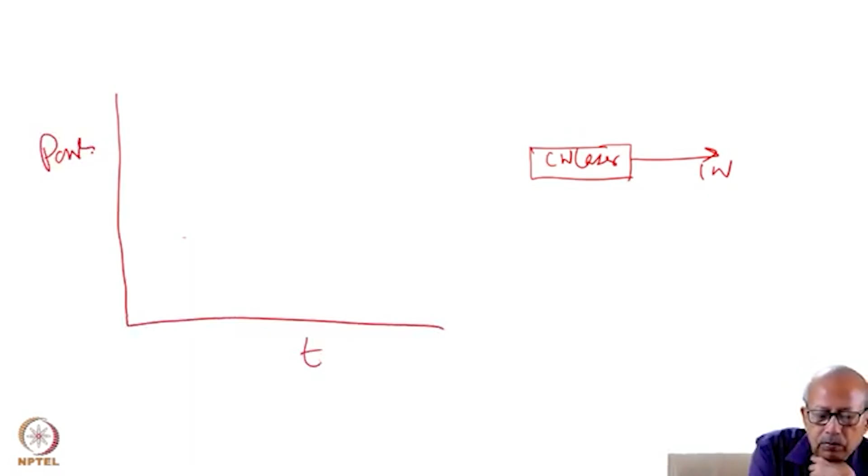It is giving out an output of power 1 watt continuously in time. So if we represent it pictorially, this is time, this is power, and this is 1 watt. So the laser is producing a continuous output of power 1 watt in time.

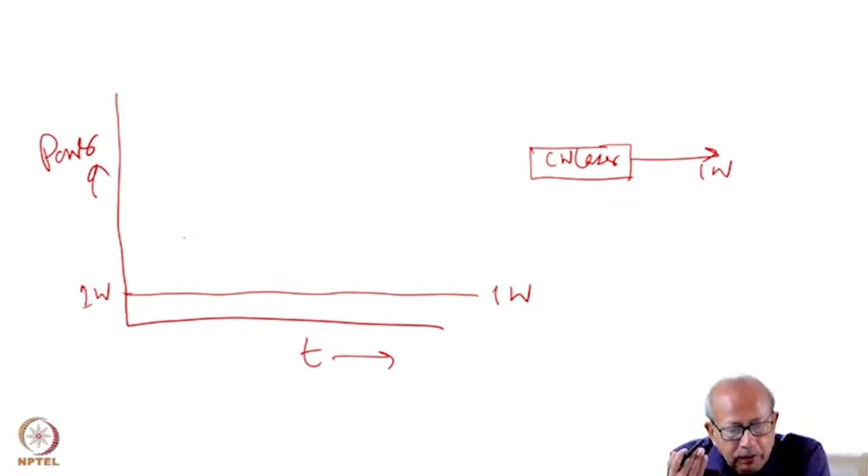Now, if you try to increase this power output by increasing the power of pumping, initially, as you increase the pumping power, you are dissipating more pump energy in time. So you will be creating more population inversion and in turn gain. Therefore, the laser would produce more output in the beginning. Suppose the laser, as a consequence of increased pumping, gives you a higher output.

But as you have increased the input energy to the lasing medium, more energy now would stay back into the system. And because of this energy, which is eventually dissipated, it will cause more heating of the lasing medium, and as a result, the population of the lower laser level will also increase because the temperature of the gas of the lasing medium will increase.

This thus in effect will reduce the population inversion. You have the upper laser level and lower laser level. If the population of the lower laser level is increasing because of increased temperature, that would reduce the population inversion and in turn the output power of the laser. So although initially the power may show a slight increase, eventually the power tends to reduce.

So 10 watt pump power means in 1 second, suppose this is my 1 second, at 10 watt power in 1 second, we are dissipating 10 joule energy. So that means this is 10 watt; we are dissipating 10 joule energy in 1 second. So in 1 second, the laser is also producing 1 joule as its optical output.

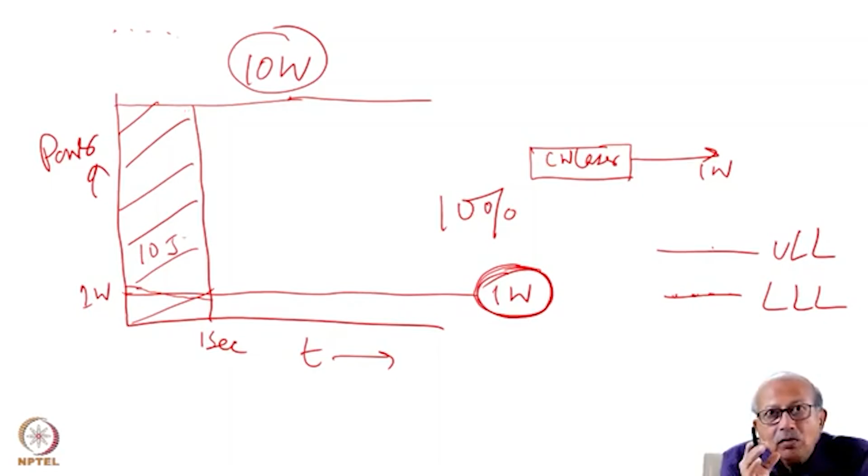Now we have said that if we try to increase this power, so from 10 joule, if we make it 15 joule, although there may be some initial increase in the output power, eventually power will reduce because as more energy is put into the system, the fraction of energy that stays back into the system also will increase. That will eventually increase the temperature of the medium, which would reflect in reduction of population inversion and in turn the output power of the laser. So how can you actually increase the power of the laser without making a provision for removal of the extra heat that is being generated?

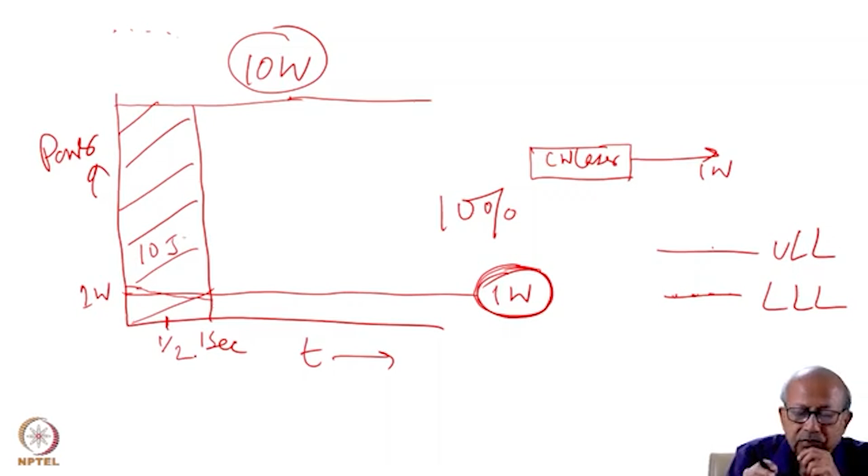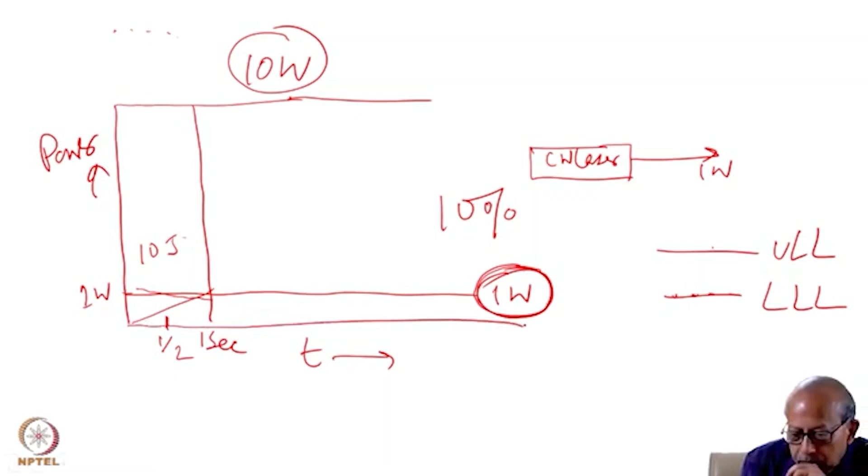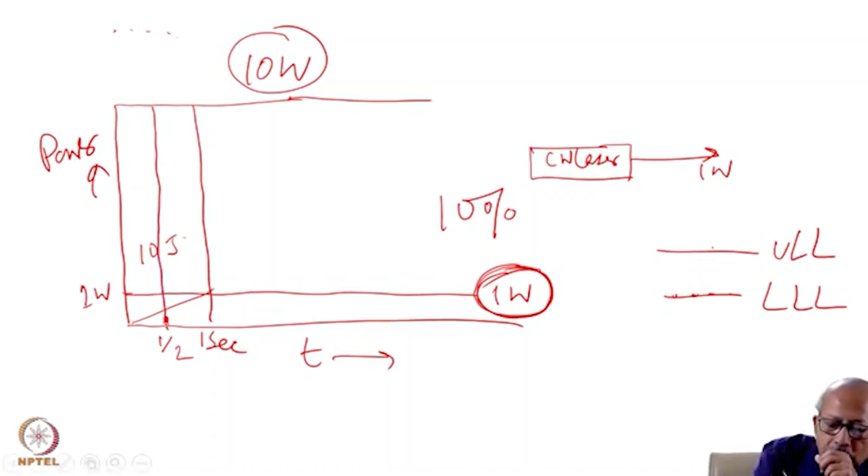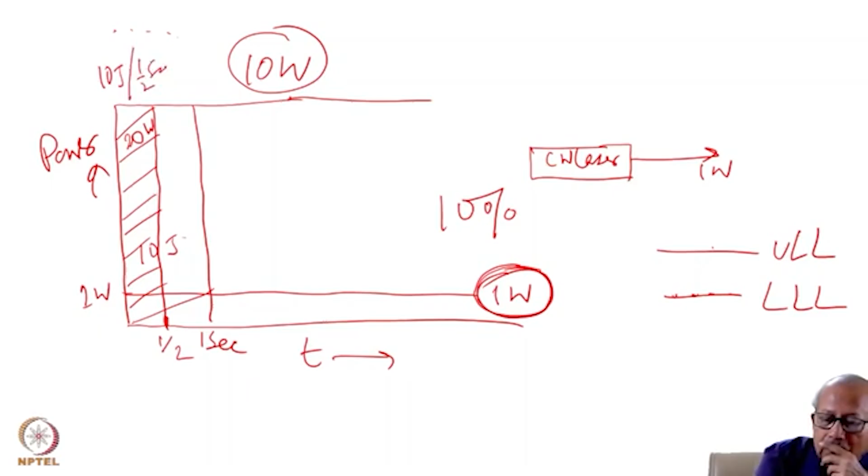You dump a certain number of joules of energy in a lesser time. For example, say we put this 10 joule of energy within a time which is half a second. So we are now putting this 10 joule of energy within half a second. Then the power that we have put in is now raised from 10 watt to 20 watt, because 10 joule of energy is now being put in half a second.

Now because you are putting in so much more energy in half a second, this will also create more population inversion and in turn the gain, and the laser will also tend to give more output. So the laser would produce more power.

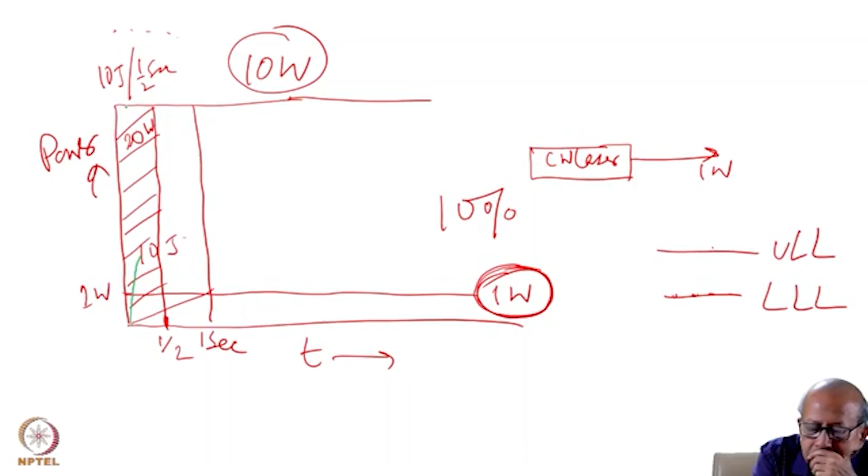Now because it is a pulse, it is being pulsed, so the energy will eventually go to zero, the energy that is being pumped in half second. The output power of the laser also would then become zero as the pumping stops after half second. Now at this point, the temperature of the medium has risen much more than what was happening in the case of continuous operation, where the pumping power was 10 watt.

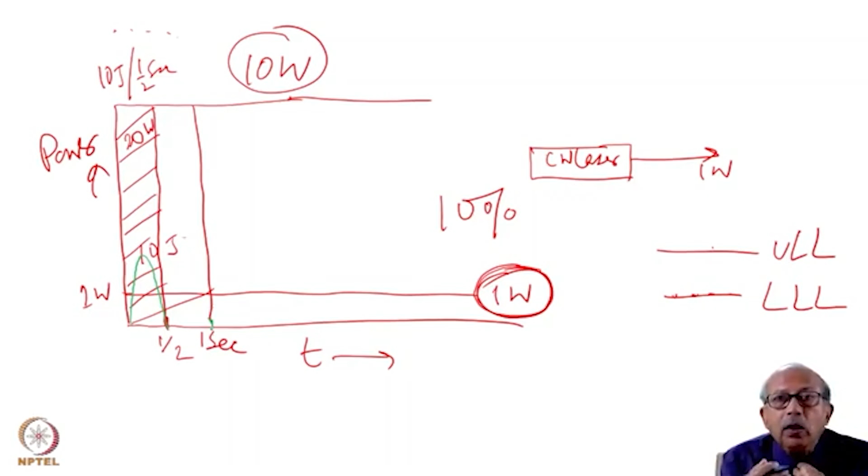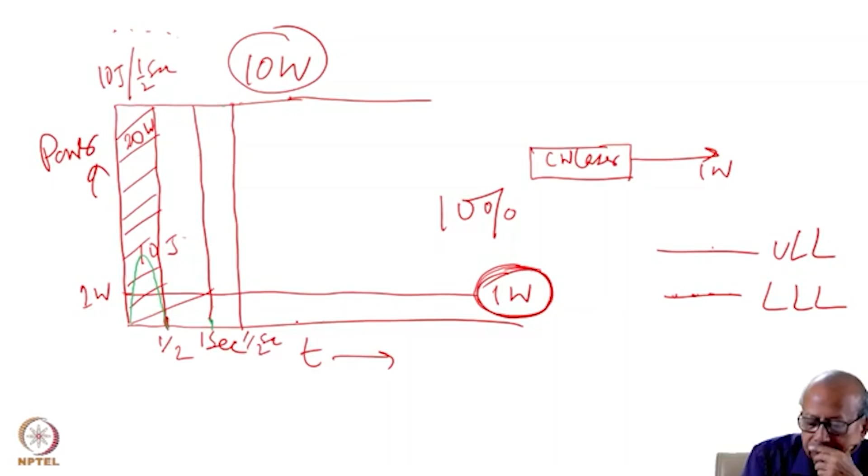Now at this point, we wait for next half second, and the medium will then return to the ambient condition. And at this point, we put again 10 joule energy for half second. So we will have now the next pulse.

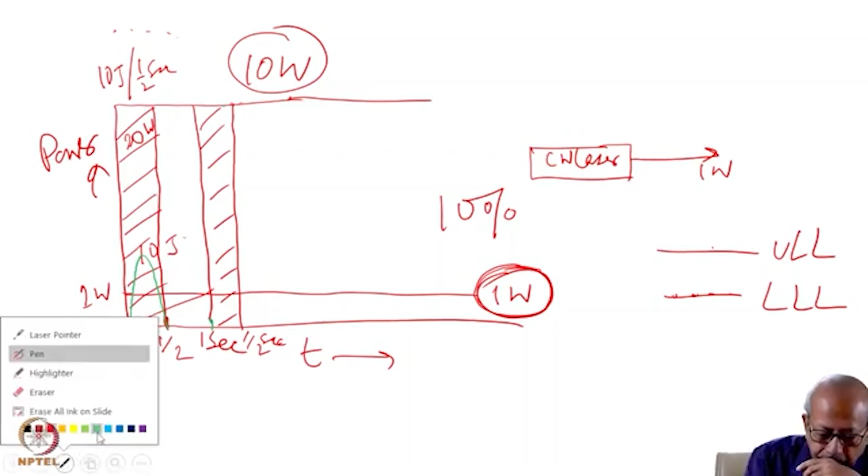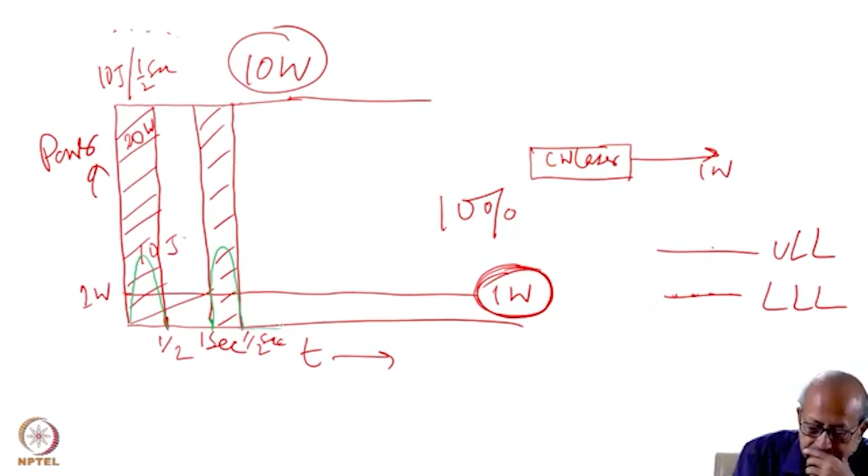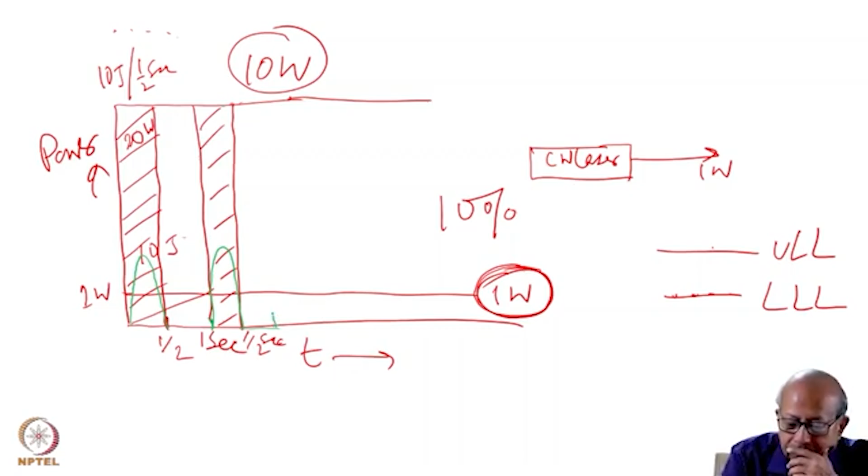So wait again half second before the temperature comes back to the ambient condition. So you put again the next pulse, and so on. By pulsing, you produce a train of pulses, and the peak power of the pulse will be more than the continuous power that was otherwise possible for the laser to emit.

Although the peak power has increased, you can clearly see the average power of the laser may still remain the same as 1 watt. So you may be wondering, why then go for all these things, because the average power may still remain the same as 1 watt? The reason is you may be looking for some application where 1 watt power will not suffice. You need more power, but you don't need that power continuously. You may need that increased power only for a brief period.

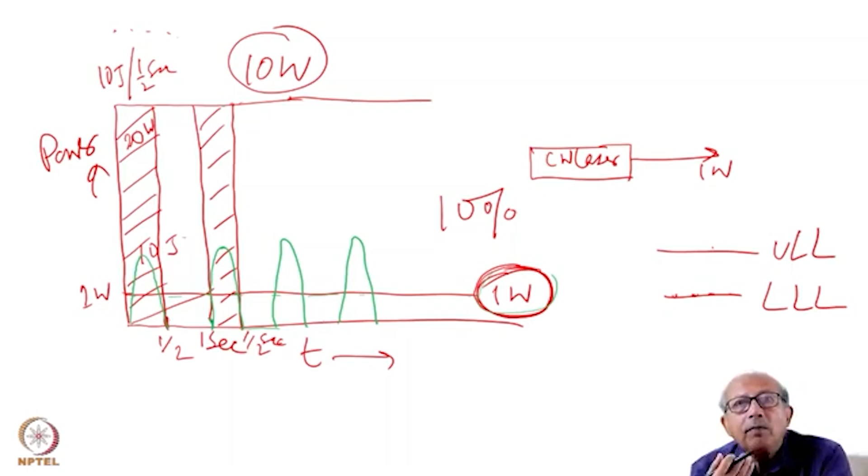That is where this comes handy. So you increase the output power, but over a brief period of time, by not making any provision to remove the extra heat that is being generated. You simply pulse, concentrate the energy within time, and you increase the power that is produced. So I think you have now understood the concept of pulsing, and how by pulsing a laser you produce more power, which otherwise would not have been possible by operating the laser in continuous mode.

Now, the next question we ask is, what is the maximum achievable power from a pulse laser? Can you indefinitely increase the peak power of a pulse laser? Well, to understand this, let us consider two situations where the energy is being pumped slowly and rapidly.

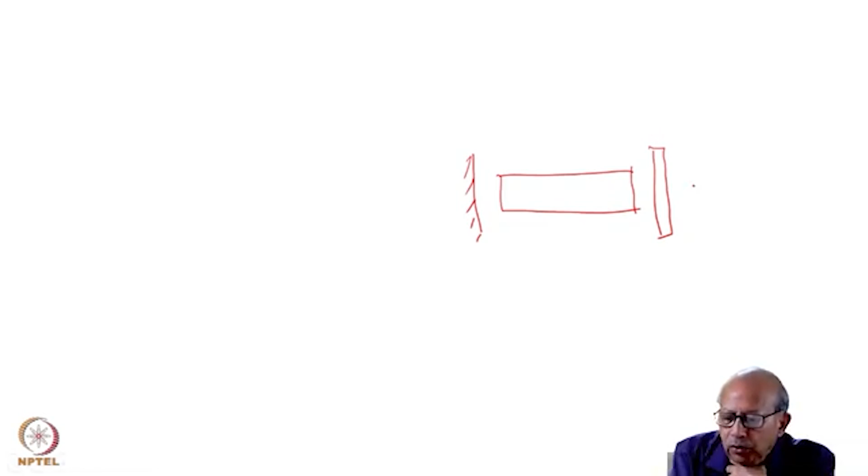Now, where does the loss actually take place in the cavity? It essentially takes place through the partially transmitting mirror. You have your gain medium placed in a cavity. One mirror is 100% reflective, the other is partially transmissive, through which you couple out a part of the light that builds up inside the cavity, which is the useful loss forming the laser beam.

Now this transmission loss of the partially transmitting mirror is independent of time. It doesn't depend on time. And therefore, the loss can be represented as a straight line parallel to the time axis in this gain curve. This is the gain.

So loss doesn't depend on time, and hence it can be represented as a straight line parallel to the time axis. This is the loss, represented as a straight line parallel to the time axis in this gain curve.

Now commencement, when will lasing begin? Lasing will begin at the instant gain crosses the loss line. When pumped slowly, this occurs at a later time, and when pumped rapidly, the gain builds up faster and crosses the loss line earlier. At this point, oscillation and stimulated emission set in, amplification of light begins, and the laser pulse starts building up. So commencement of lasing begins at the instant gain crosses the loss line.

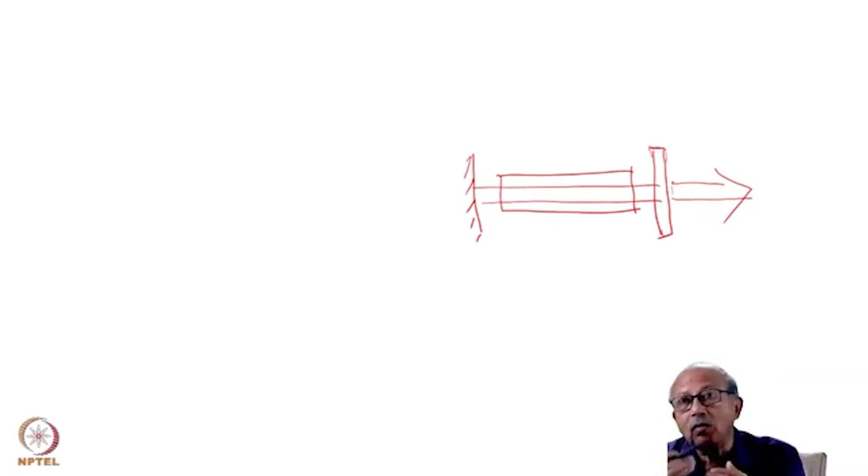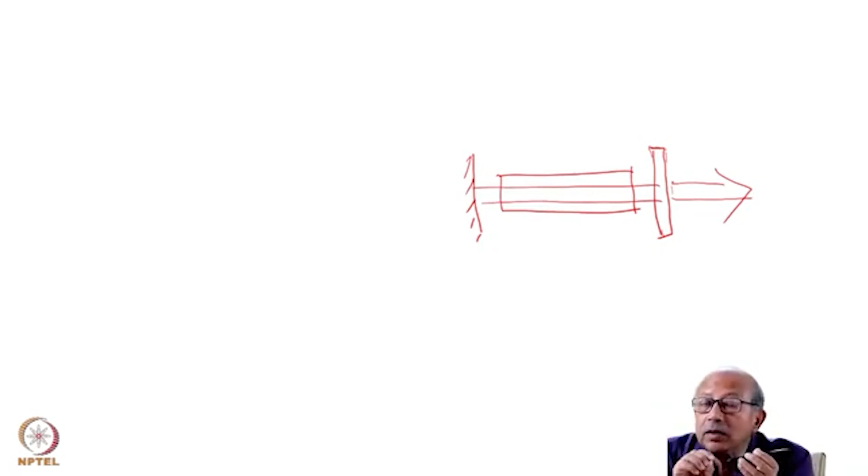Now, stimulated emission adds a photon to the system, but reduces the population inversion at the same time by 2. Let us appreciate this point. Say this is your cavity. You have the active medium because you have pumped it, so the gain has risen, and once it has crossed the loss line, oscillation has begun, and light is actually growing inside the cavity as a result of to-and-fro oscillation of photons, initially seeded by spontaneous emission. You know all these things quite well.

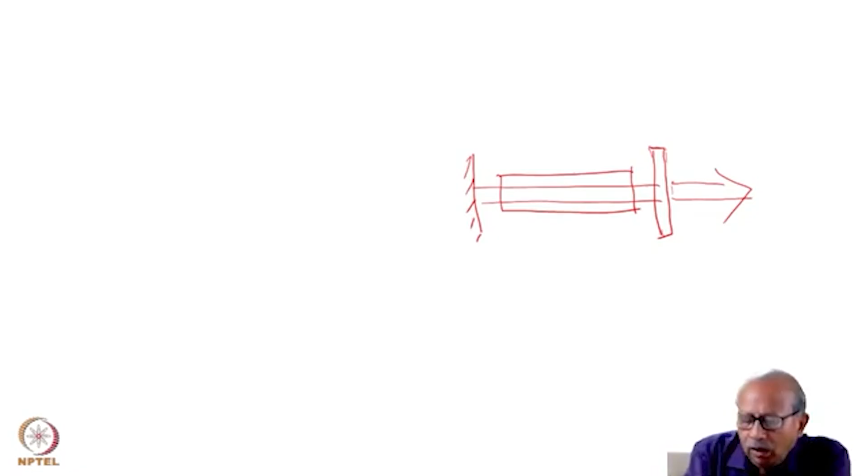Suppose we consider the two energy levels between which population has been inverted. This is the lower laser level, this is the upper laser level. Let us consider a situation where the lower laser level has 4 atoms, and the upper laser level has 10 atoms.

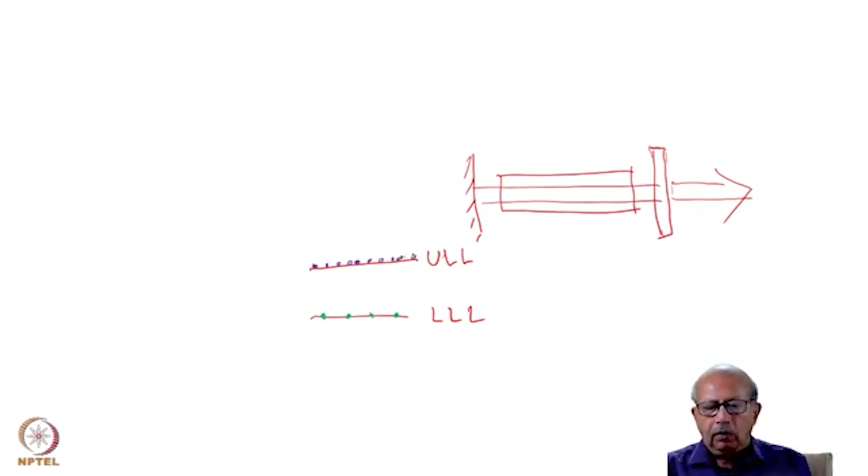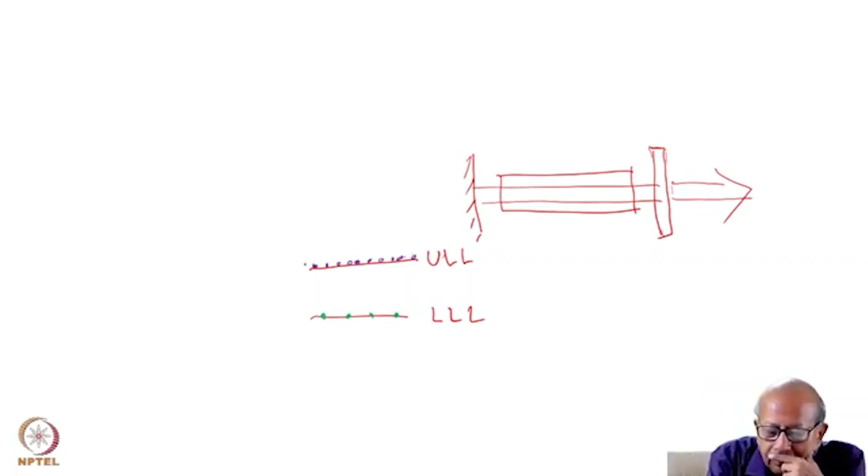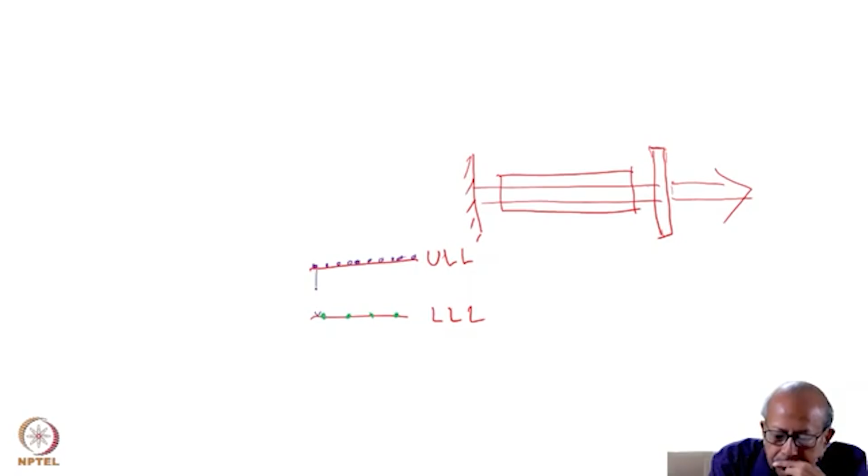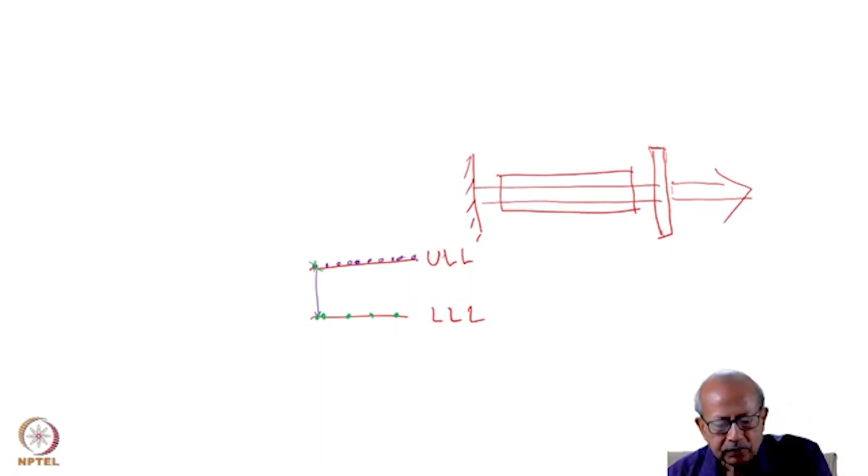Now let us consider one stimulated emission. There will be many stimulated emissions happening, but let us just consider what happens with a single one. This atom is stimulated by the oscillating photons, and as a result, it comes down to the lower laser level. So it now becomes this, and this atom has vanished, instead coming down to the lower laser level.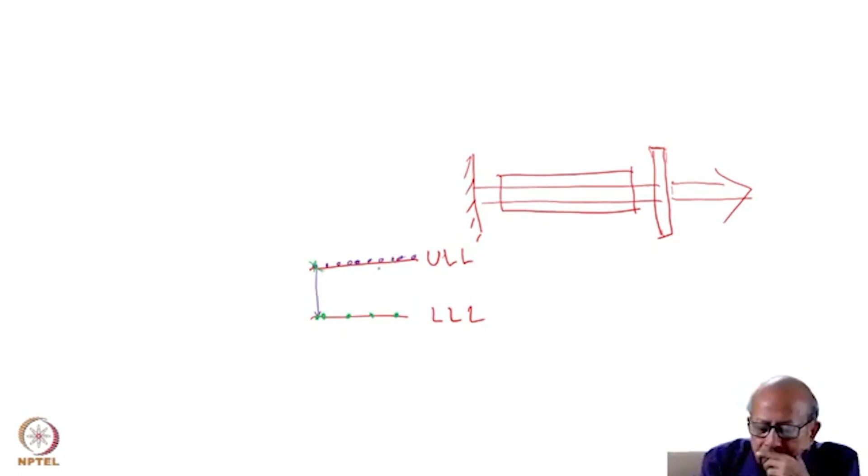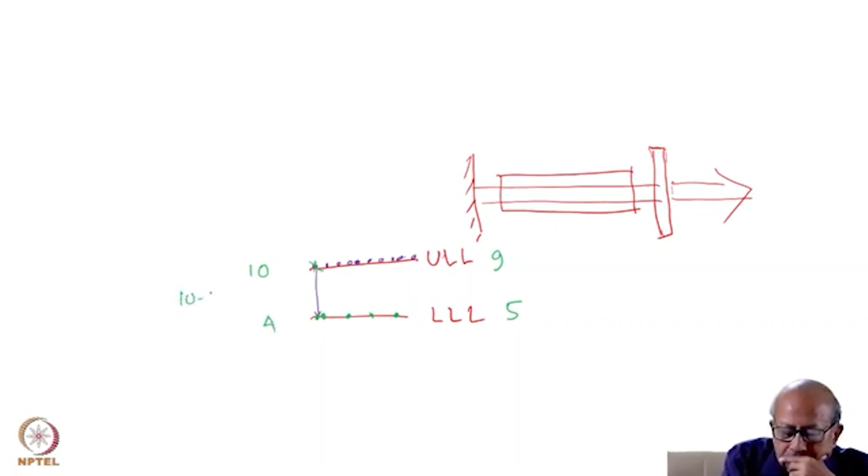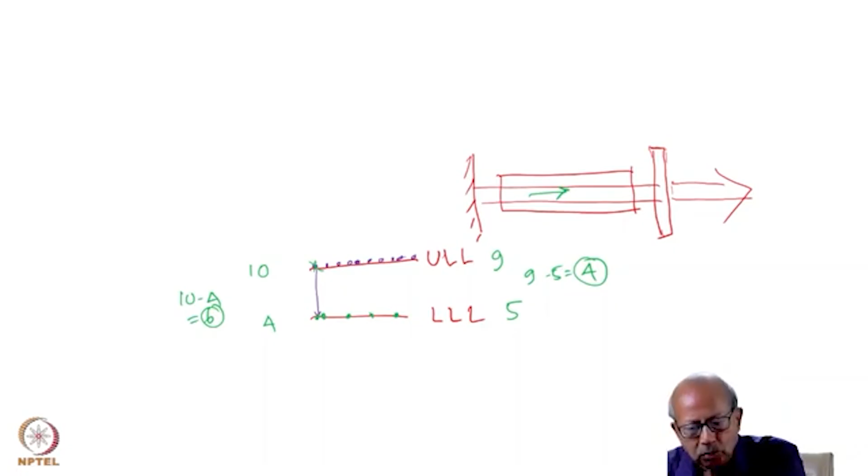After this happens, the population at the upper laser level is now 9, and the lower laser level is 5. Before this happened, the population in the upper level was 10 and the lower level 4, so the population inversion was 10 minus 4 equal to 6. Now it is 10 minus 5 equal to 5, wait, 9 minus 5 equal to 4. So the stimulated emission has added one more photon to the system, but at the same time reduced the population inversion from 6 to 4. That means population inversion has been reduced by 2, while stimulated emission has added one more photon to this system of photons oscillating inside the cavity.

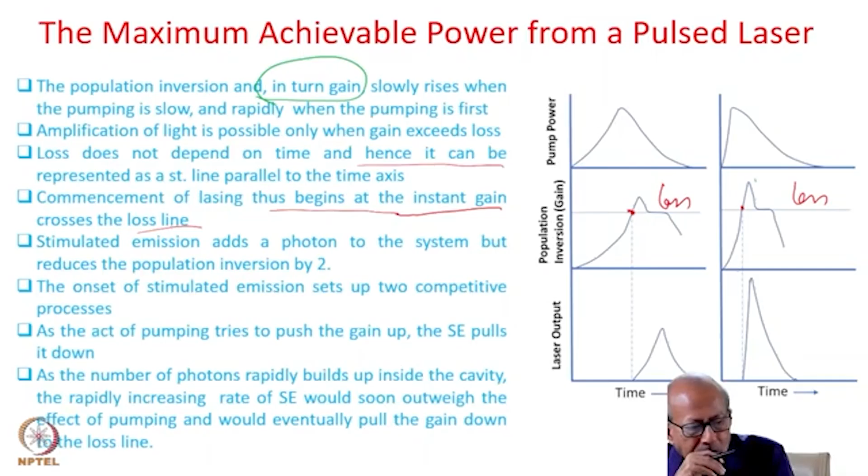Thus we can say the onset of stimulated emission sets up two competitive processes. Why? Because the act of pumping is trying to push the gain up, as we are putting more energy into the system, this tends to increase the gain, while stimulated emission pulls the gain down. So the act of pumping tries to push the gain up, and stimulated emission tries to bring the gain down. True, stimulated emission also adds photons to the system, but at the same time reduces the gain.

Now, as the number of photons rapidly builds up inside the cavity as a result of stimulated emission, the photon number increases. And if the photon number increases, it also increases the rate of stimulated emission, because stimulated emission is proportional to the number of photons present. More photons means more stimulated emission, and more stimulated emission means you are pulling down the gain at an increased rate, because each stimulated emission brings down the gain by 2.

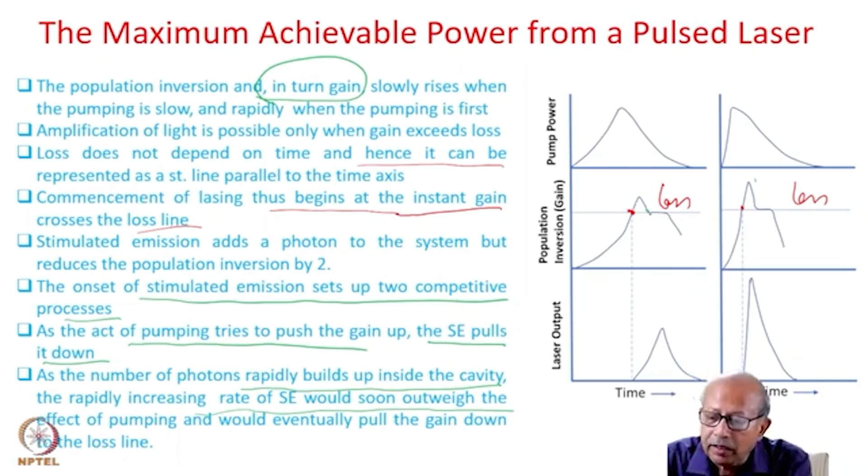Thus we can say that the rapidly increasing rate of stimulated emission would soon outweigh the effect of pumping and would eventually pull the gain down to the loss line. Because you are trying to increase the gain, but the stimulated emission rate, continuously increasing more and more rapidly, would eventually succeed in pulling down the gain to the loss line. And once this happens, thereafter the gain remains clamped to the loss line.

Imagine the situation where you have slightly increased the gain to some extent. Once this situation has been attained, you try to increase the gain further. The moment you try, the stimulated emission rate also increases along with the gain, because more photons will be generated, and then immediately it tries to bring the gain down. So once the gain comes to the loss line, it stays clamped there. This is called gain clamping.

So it will continue until the waning of pump. You are actually pulsing it, putting the pump energy in the form of pulses. Eventually the pump energy will tend to reduce, which will put the gain below the loss line. It has to happen.

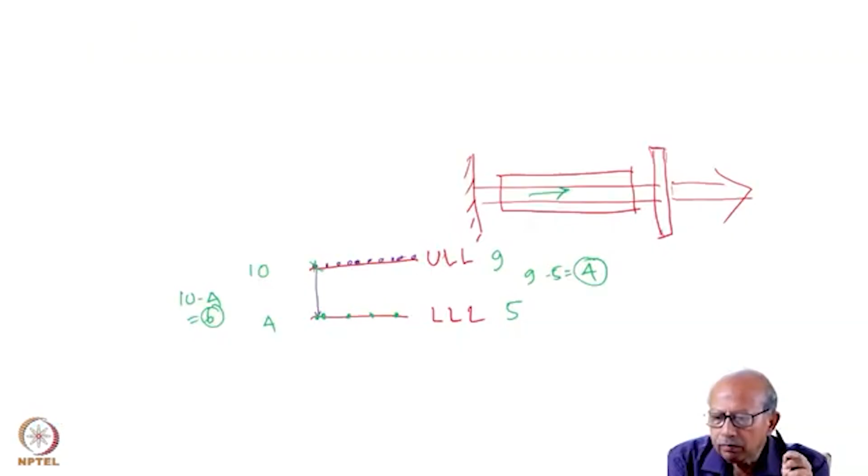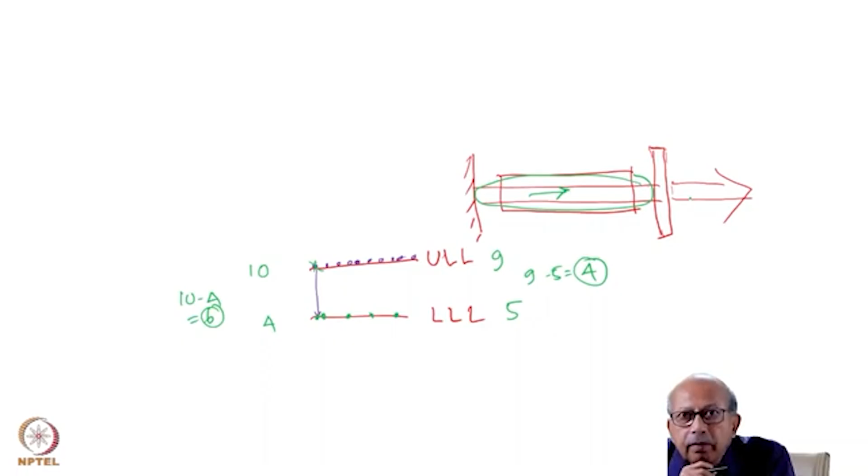However, the photons still present inside the cavity will continue to emerge through the partially transmitting mirror. Now, gain has fallen below the loss line, so there cannot be any more oscillation. But photons already present inside the cavity will continue to emerge through the partially transmitting mirror. The higher the transmission loss, the faster they will emerge, and vice versa.

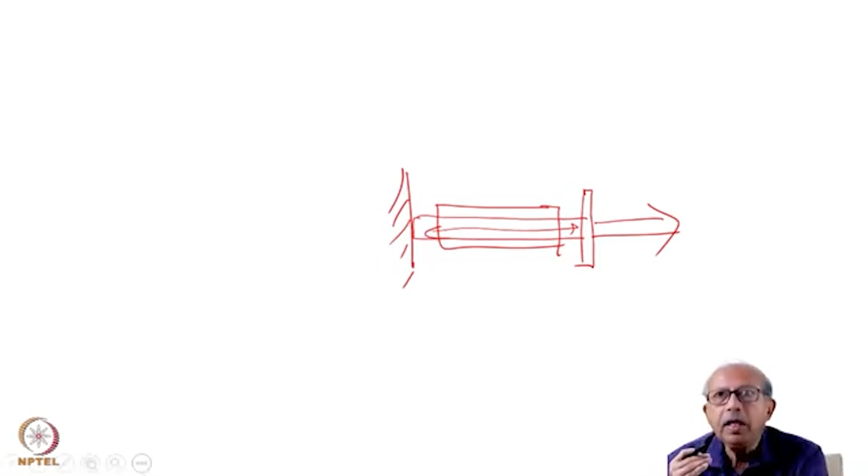Clearly, therefore, when energy is pumped into the medium rapidly, the gain will rise higher. The photons already present inside the cavity will continue to emerge through the partially transmitting mirror, because light has already grown inside the cavity and was giving out this light. But when the gain drops below the cavity loss line, there cannot be any more growth of light. The light present inside the cavity will continue to emerge through the partially transmitting mirror.

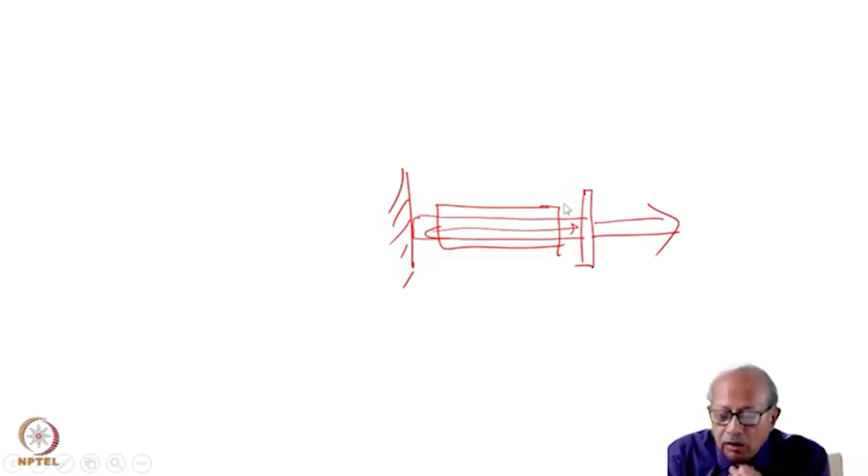And how is the transmission loss? The higher it is, the faster they will emerge, and vice versa.

Clearly, therefore, when energy is pumped into the medium rapidly, the gain will manage to rise to a higher value, because gain rises at a faster rate. So before stimulated emission can beat it and pull it down to the loss line, that gain would have risen to a higher value compared to the case where it was pumped slowly. So if you pump rapidly, gain rises to a higher value, and a higher value of gain will be reflected in higher output power of the pulse.

Thus, you see that by increasing the rate of pumping, if you pump faster, the gain rises to a higher value, and this will eventually result in higher output power of the pulse. Therefore, by increasing the rate of pumping, you can increase the peak power of the pulse.

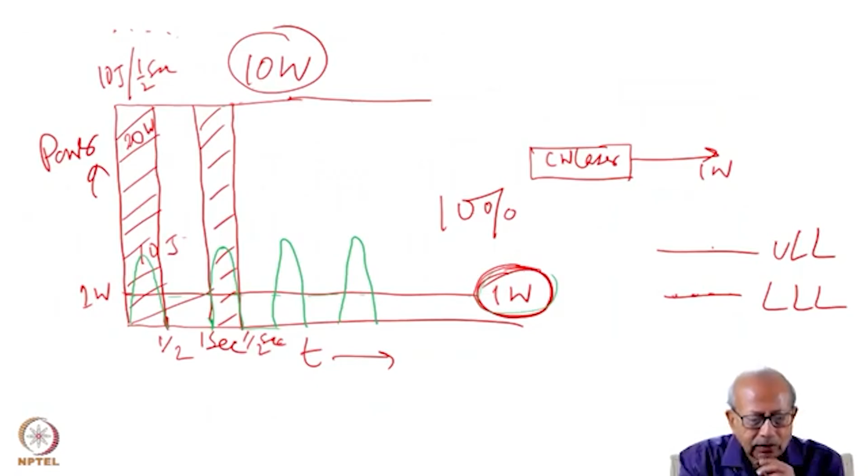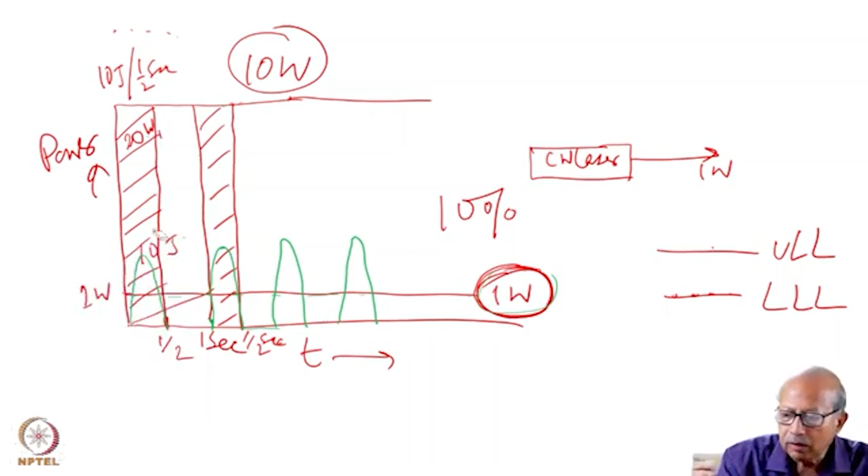Now, to understand this more clearly, let us consider this example once again. Here we were pumping the energy. So in the example that we had shown, the CW laser was emitting at a power of 1 watt.

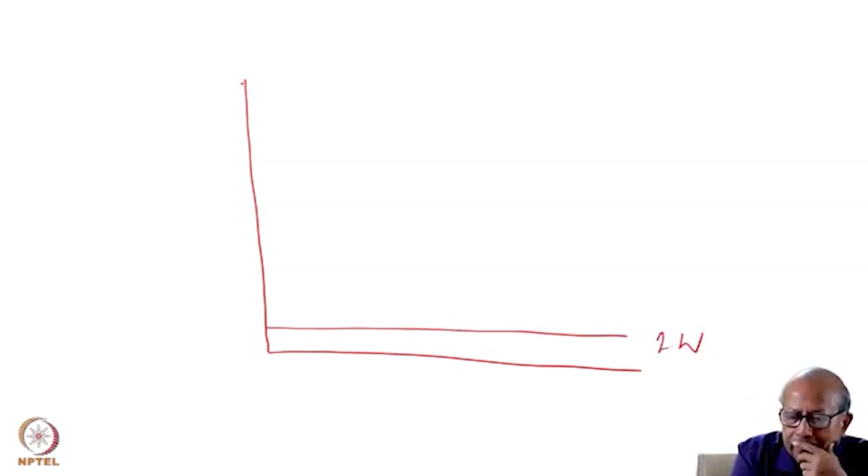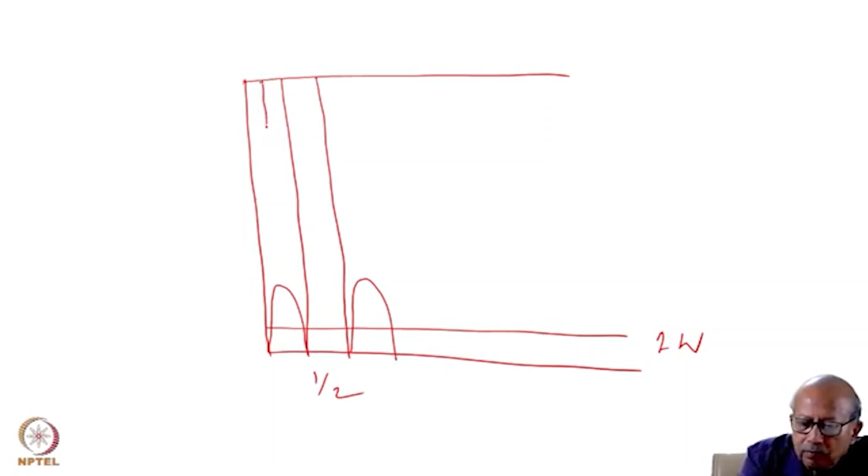Now by pumping it for half a second, and then not putting any pump energy for the next half second, we were able to increase the power like this. So now we put this 10 joules of energy instead of half a second, we put it in a quarter second. So now here the power is 40 watts. 10 joules is being pumped in a quarter second, so the power here is 40 watts.

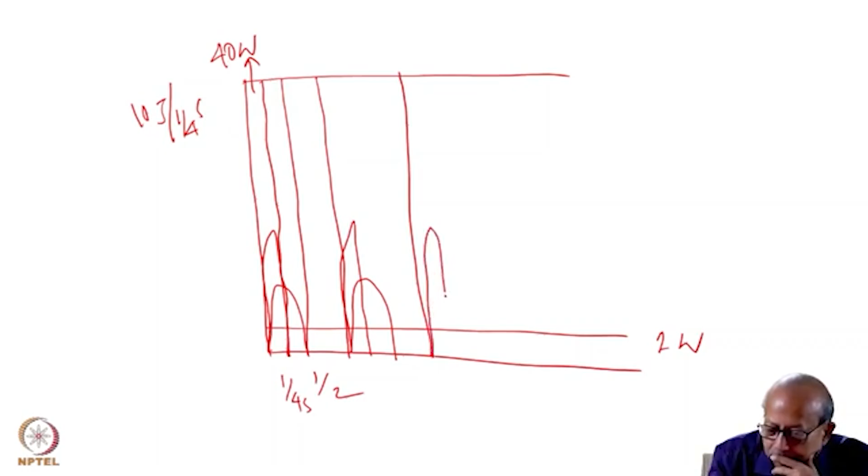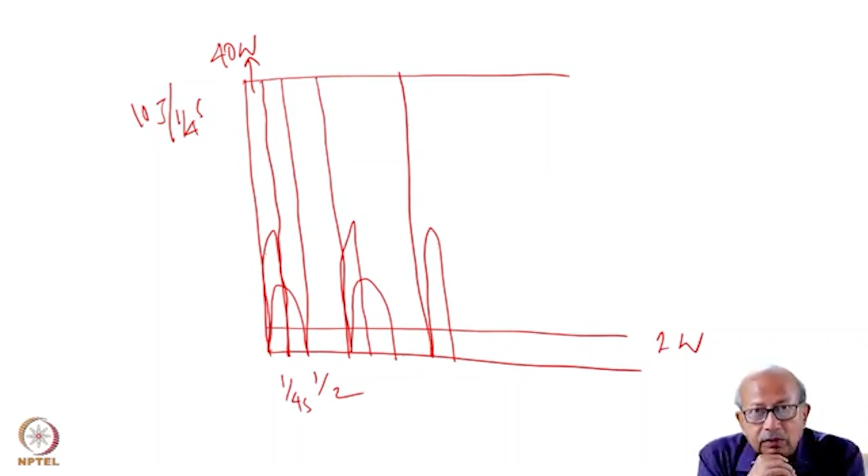So then, because we are now putting more power with the same energy within a quarter second, the power will rise even more. And you put the next one here. That way, as you increase the rate of pumping — in the first case you are pumping 10 joules in half a second, in this case you are pumping 10 joules in a quarter second — your rate of pumping has become more, so you are getting more output power of the pulse.

So by increasing the rate of pumping, you can increase the peak power of the pulse, but of course, how far can you go? It depends on the capacity of the system, how fast you can pump your energy.